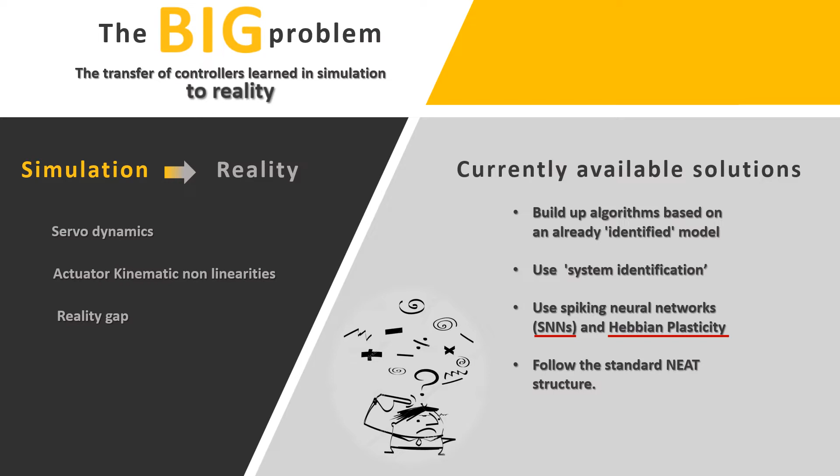And what the team came up with next was a spiking neural network. This managed to solve the majority of their problems. Now, the team chose SNNs rather than ANNs because ANNs follow a computation cycle of multiply, accumulate, and activate, where you feed the neural network a weighted sum of inputs and an activation function, and it generates an output accordingly. This is sort of loosely based off an actual neuron.

SNNs, on the other hand, are based more closely on the biological modeling of neurons and more closely resemble how a real neuron works and fires off in our brain. SNNs transmit data in the form of discrete spikes, which gel well with the system because it allows the team to have more control over the complex computations that result from the SNN model in a much faster way while consuming way lower power levels compared to its non-spiking counterparts.

In order to help with the process of designing this, the team has developed the ESPINN software, which has been completely coded in C++, and it stands for Evolving Spiking Neural Networks. For this system, the team has chosen to implement the two-dimensional Izhikevich model due to its capability of exhibiting richness and complexity in neuron firing behavior with only two differential equations.

Firstly, the variables that we need to know here are the recovery variable, the synaptic current, and the membrane potential. One of the most important things to note is when the spikes are fired off, which is whenever V exceeds the threshold of membrane potential, a spike will be fired and the reset follows equation 2. Now I'm going to show you a video here. This video perfectly explains the spiking when it meets the given threshold.

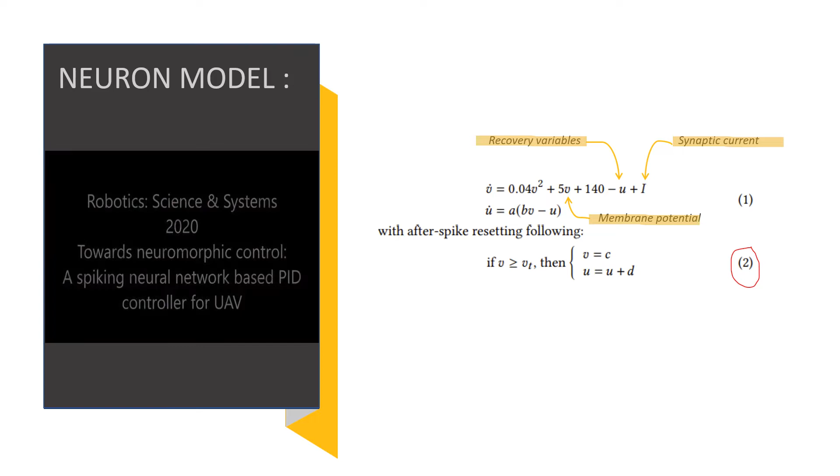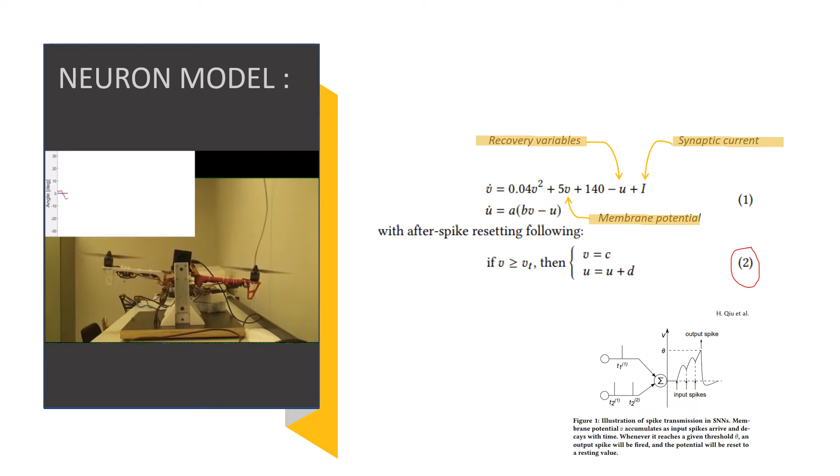So the red line there is our neural network, and the blue line is the intended angle that the drone has to fly. And as you can see, it's doing this beautifully. Now, when we put it mathematically on a diagram, we can see that the membrane potential V accumulates until it meets that threshold here.

Our neural network looks very similar to this. It's made up of three layers and it follows the NEAT topology. We have the input layer, which has the encoding neurons which convert information, the hidden layer, which has spiking neurons connected unidirectionally, and that makes sure the most recent inputs are preserved when run. And then we also have the final output layer, which will activate the spiking.

Now I hope you remember that I mentioned Hebbian plasticity previously, and the best way to describe Hebbian plasticity is in the form of two strangers that both seem to love playing games. The minute they realize this, they shoot each other an arrow, and now their bond just grew stronger, and they've now become gamer friends. With every subsequent arrow, this bond only seems to grow and grow until they can instinctively predict when they're shooting their arrows.

The formal definition of Hebb's plasticity theory is when two interconnected neurons on either side of a synapse are both switched on, fired, or activated at the same time, then the synaptic weight, which is the strength or bond in our case between them, should increase. And when they get fired at different instances, their strength or bond decreases.

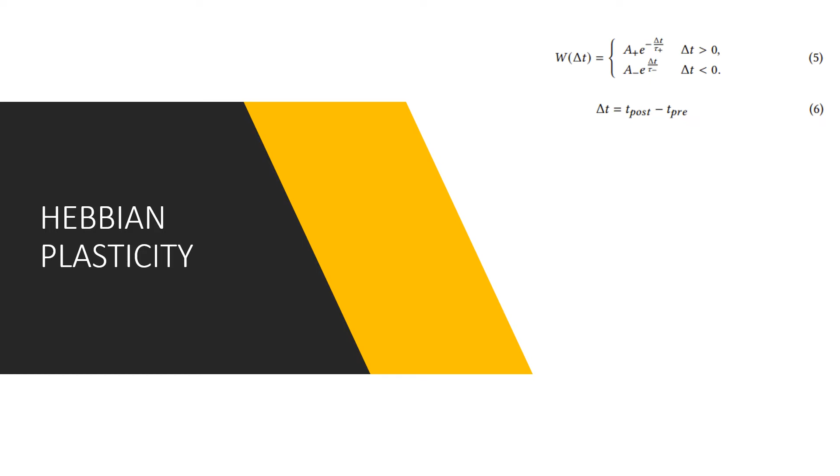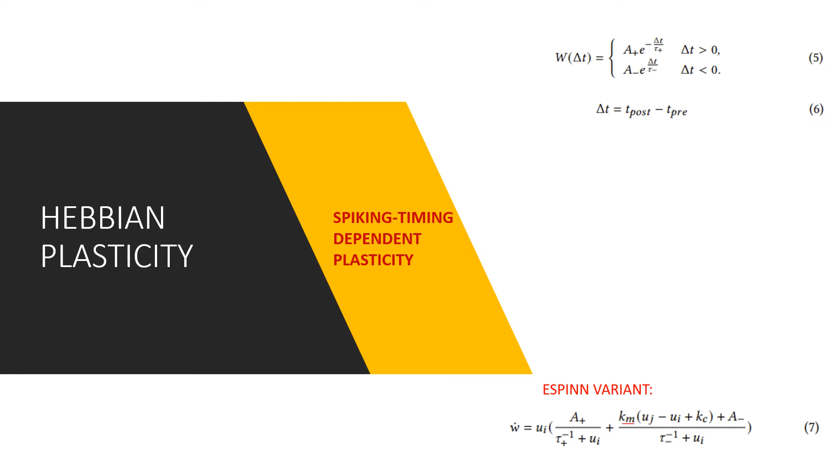Now the mathematical formula is as follows. The important bit here is equation 6, the time difference between pre and postsynaptic firing timings. In ESPINN, the team has introduced their own rate-based Hebbian model derived from the nearest neighbor STDP implementation with two additional evolvable parameters, where Km is a magnitude of the amplitude of weight changes and Kc is a correlation term that determines the magnitude between pre- and postsynaptic firing activity.

These two factors are one of the most important variables in this paper, as they are the two factors that have been set to be evolvable so that the best values can be automatically located. Now, as you can see in this graph, we've got a steady Hebbian learning curve, and the bond is fairly consistent and strong between the pre- and postsynaptic firings. This is awesome, as you can get better results in performance.

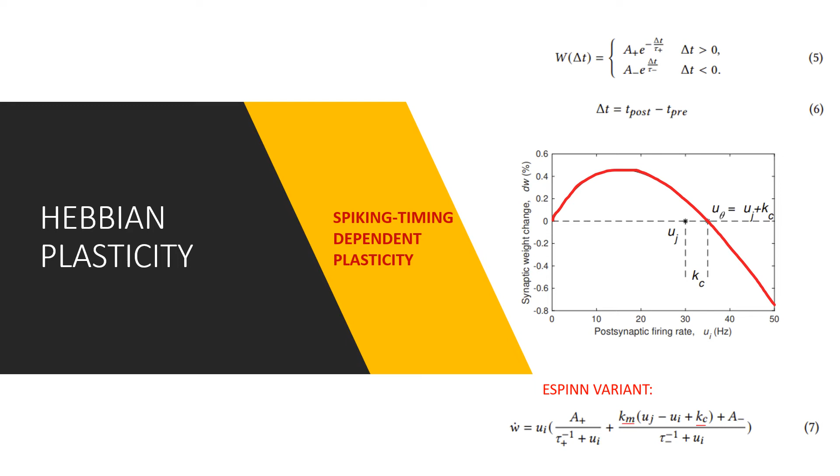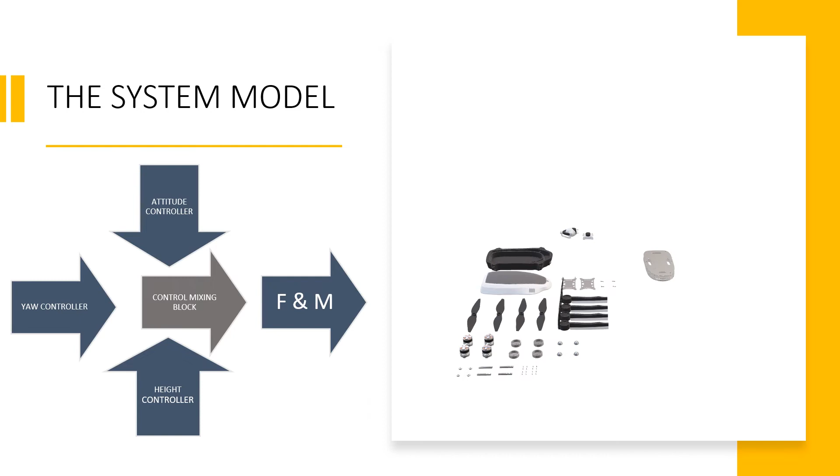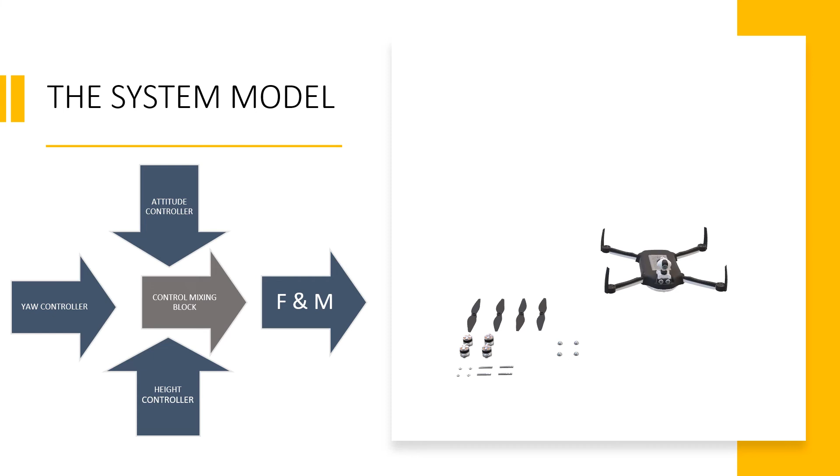We've now reached the coolest part of this presentation. The researchers have chosen a commercial hexacopter, the Tarot 680 Pro, fitted with the Pixhawk 2 autopilot system. It's set up in different control blocks, starting with the attitude controller, which controls the orientation, the yaw controller, which controls the yaw, and the height controller, which controls height. All of these calculate the appropriate rotor speed commands using the linear mixing matrix.

These lead into the control mixing block, which combines the commands into the forces and moments block, which then takes these commands and calculates the thrust and torque of each rotor based on the relative airflow through the blades. The thrust and torques are then fed into the hexacopter dynamics block, which is then fed into our model's output.

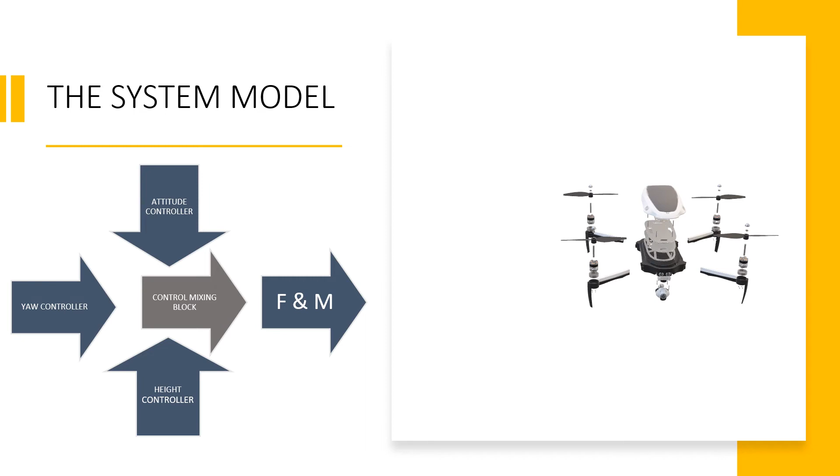To build a loose model that can resemble the heave dynamics of the hexacopter, the team has to basically model the relationship between vertical velocity Vz, collective thrust T, and the vertical acceleration Az. The identified model is as follows. It consists of a couple of different variables, Kt and Kv being the only configurable coefficients, and B is a bias that is also tunable to make sure that the linear function will be expanded at some point.

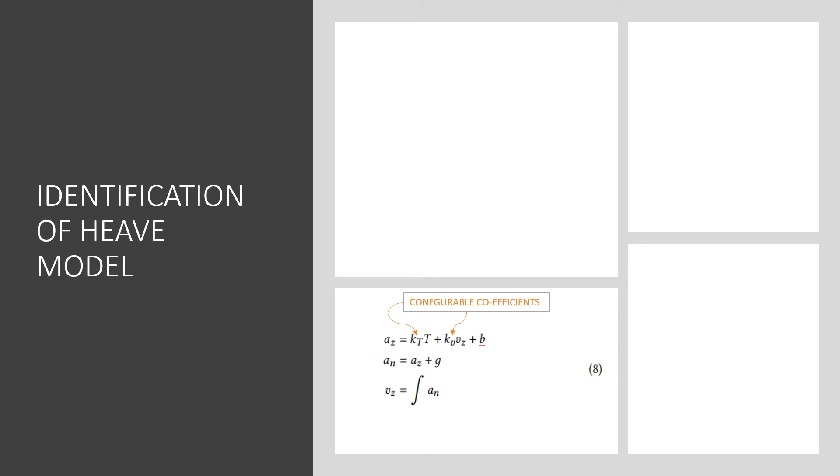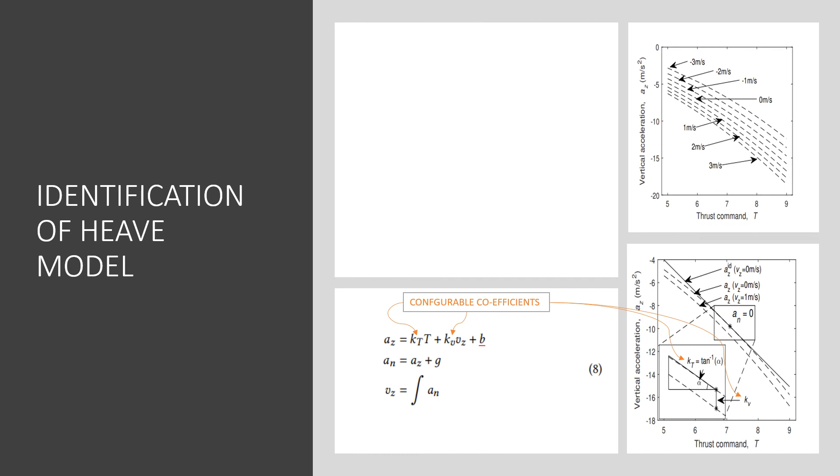Taking two of those curves, we get this graph here, and we're able to formulate the linear function displayed in this graph here into this. We can then finally get the same random thrust values and feed it into two different models for validation of functional similarity, and then we get this graph here. What we get in response is that the identified model is closely resembling the original.

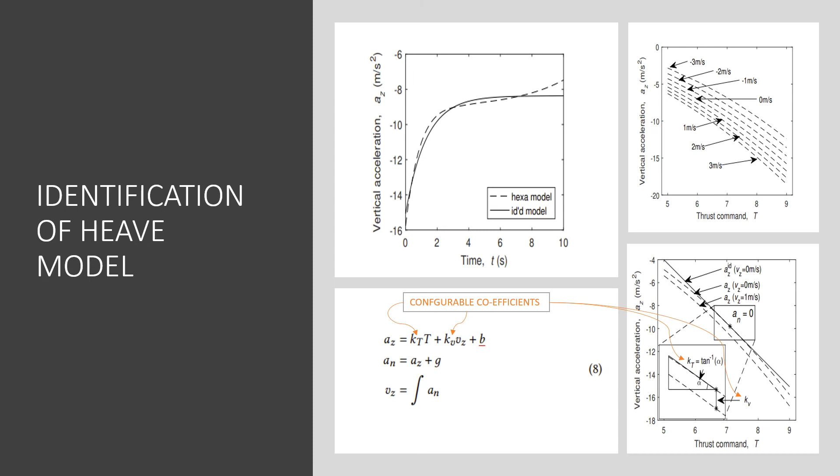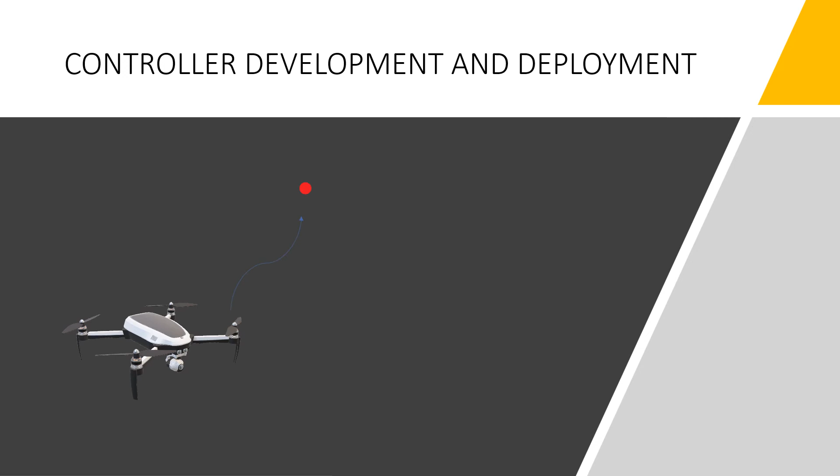The team of researchers' next step is to begin developing their SNNs using the NEAT topology. And the goal here is to make an optimal model that's able to drive the drone model to follow a reference signal with minimal error in height during the course of its flight. Each simulation flight lasts for about 80 seconds and is updated every 0.02 seconds.

This is basically a constraint problem due to the fact that the height of the UAV has to be bounded within a certain range in reality, and how the team goes about solving this is using the feasibility first principle to handle the constraints. How this works is we've got a solution space. We divide the solution space and we've got two disjoint regions called feasible and infeasible.

And what we have here is we give a solution for feasible where E modulus En denotes the normalized absolute error between actual and reference position, and for infeasible solutions we have Ti, which is the steps that the hexacopter has to successfully take to stay in place in the bounded region, and Tt is the total number of steps the entire simulation has.

A couple of comparisons are conducted between plastic and non-plastic counterparts to test which performs better. The team conducted 10 test runs for analysis, and these are all recorded offline on MATLAB. What we see here is a fitness table for 10 test runs comparing plastic and non-plastic counterparts. And evolution is terminated after 12 generations, as the performance doesn't improve. And as you can see, in 9 out of 10 test runs, when plasticity is enabled, they get an increase in fitness.

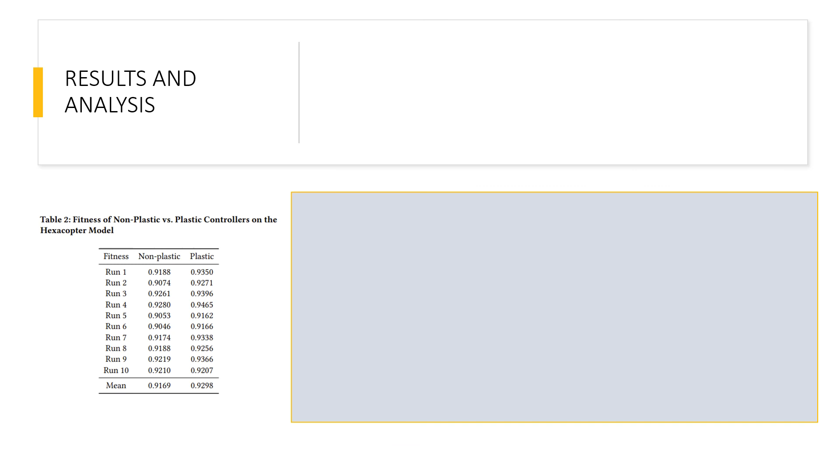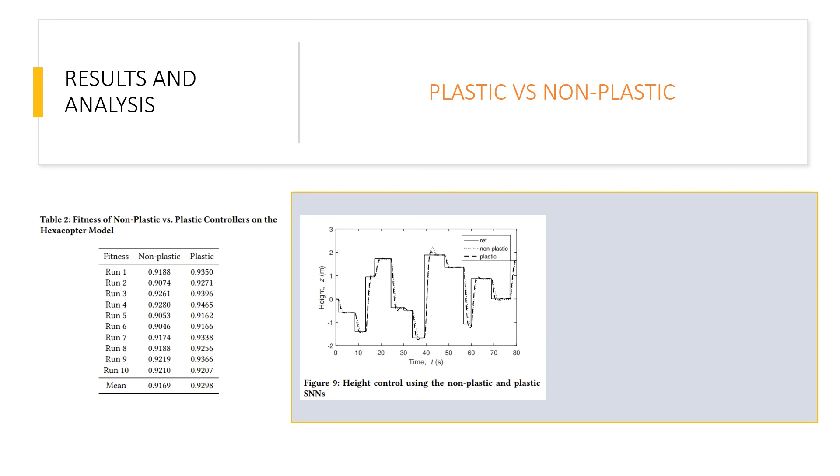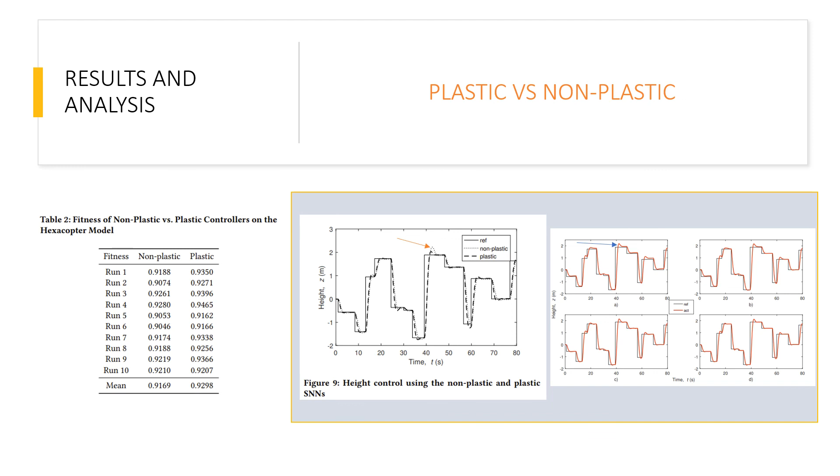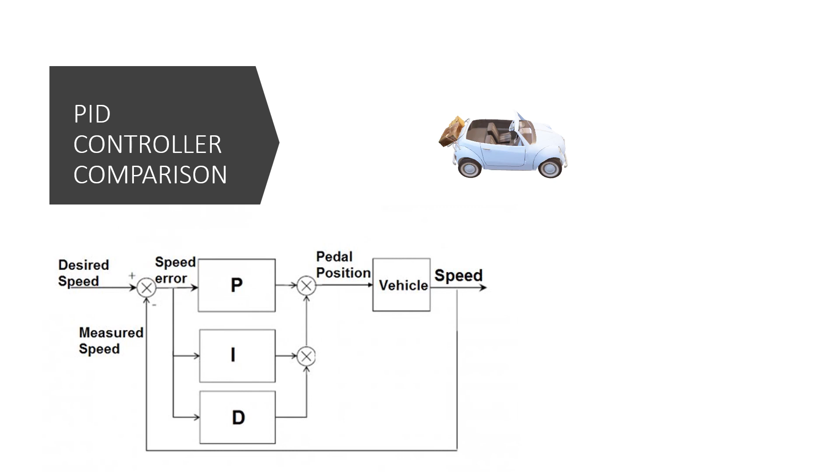This brings us finally to the end of our presentation, and I thank you so much for listening to me.